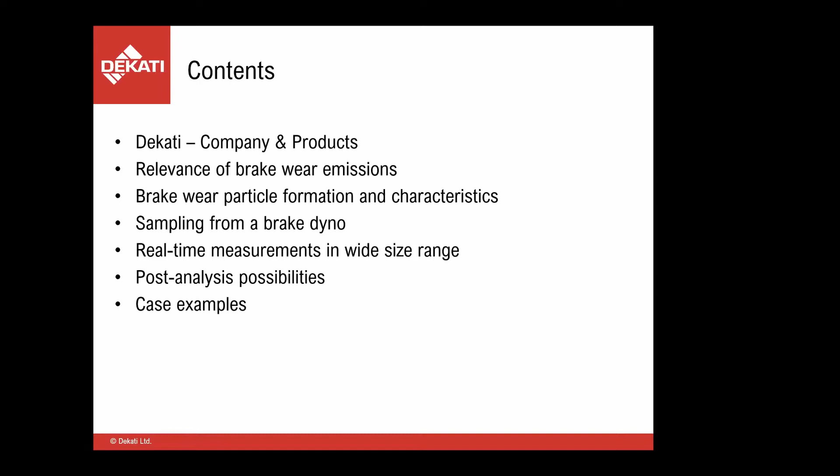A couple of words about Dekati. Dekati has been around for over 25 years now, and we sell, manufacture, and develop new fine particle measurement solutions. The core competencies are in real-time measurement instruments for wide size range, and also sample conditioning for all kinds of atmospheres and all kinds of measurement applications. Dekati is a privately owned company, originally spun off from Tampere University of Technology Aerosol Physics Lab, and we're located in Kangasala, Finland. Most of our sales go to export, and we have a wide distributor network. We have over 20 high know-how employees in the company, and very recently we got the ISO accreditation also.

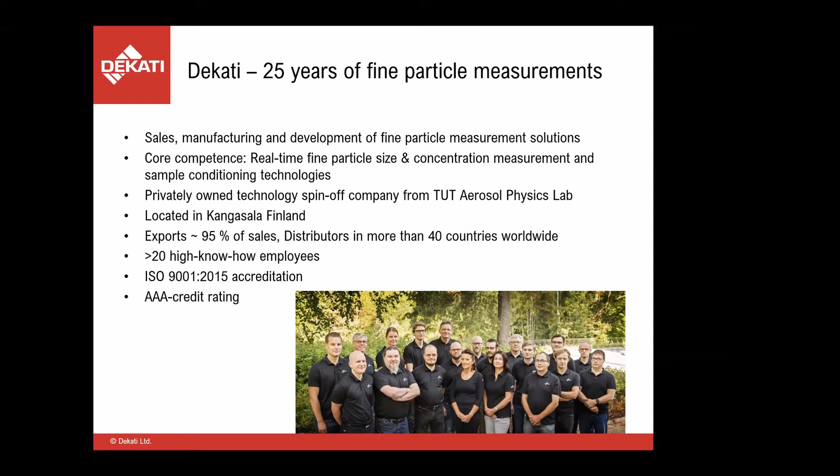We'll not go through this in detail, but we have several real-time instruments. Then we have impactors for gravimetric measurements, like offline methods. And then we have a variety of sample conditioning devices to also get the sample from high temperature and high concentrations.

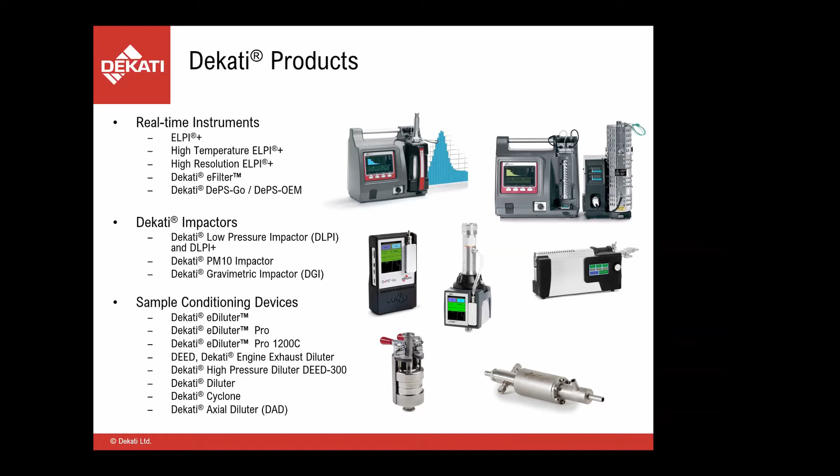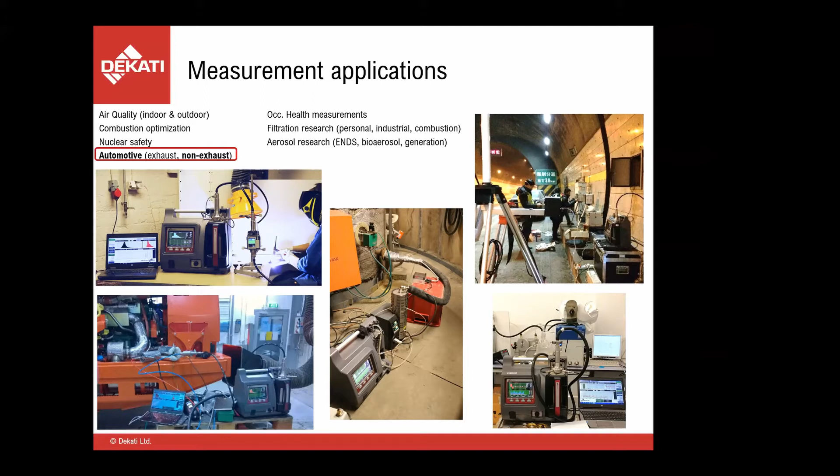Our instruments are being used in a variety of different applications. Today we will focus on the automotive application, and to be more precise, on the non-exhaust applications. But Dekati instruments are widely used in, for example, air quality, combustion studies, nuclear safety, and also filtration research, which was the topic of the previous Dekati webinar, which you can find on our YouTube channel if you want to have a look at that as well.

Okay, let's hop into brake wear emissions then. So when we look at traffic and road transport, there's a way to categorize the particle emissions coming from traffic into non-exhaust and exhaust emissions. And actually, according to the studies, their contribution to total ambient PM10 emissions are roughly equal nowadays. The exhaust emissions are obviously related to the combustion in gasoline or diesel engines most often, and most of these exhaust emissions then come out of the tailpipe of the vehicles. But then if we look at the non-exhaust particle emissions, their most significant sources are brake wear, tire wear, and road abrasion.

According to the studies, brake wear contributes to about 16 to 55% of non-exhaust emission PM. And the largest fraction is seen in urban areas because of the braking frequency being higher, and obviously also a lot of vehicles there and a lot of stops.

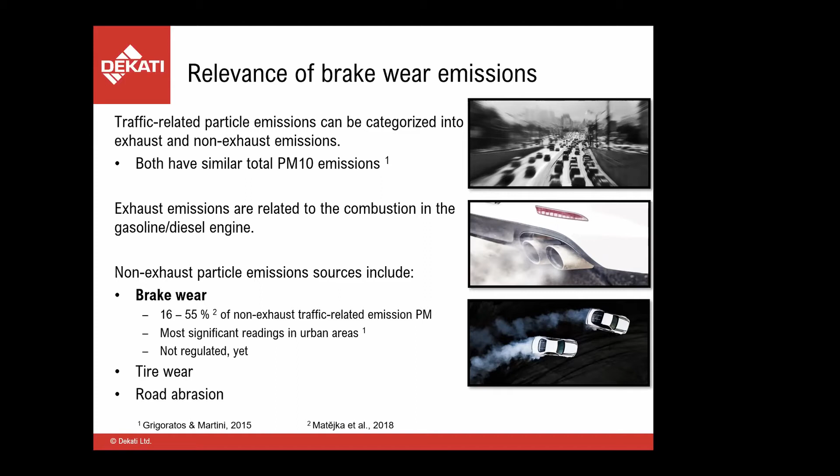Brake wear emissions aren't yet regulated. There is work being done towards legislation to work on recommendations for that, but that is still yet to come and under processing. Today we will focus on brake wear, although tire wear, for example, is also being studied and researched more and more nowadays.

If we look at the development of the situation with these non-exhaust emissions, this is from UK Department for Transport. Looking at their graph, we can see that the decline in this century in exhaust emissions for PM2.5, particulate matter under 2.5 microns, has been very fast. So we are already in a situation where the non-exhaust PM2.5 exceeds the exhaust PM2.5 because of the more efficient cleaning and filtration and the engine technologies and the after treatment.

And this is mostly for diesel and DPF filters, for example. But if we look at what they forecast to be the situation, for example, in 2030, the non-exhaust PM2.5 will already be about 10 times the amount that the particle emissions PM2.5 come from the tailpipe.

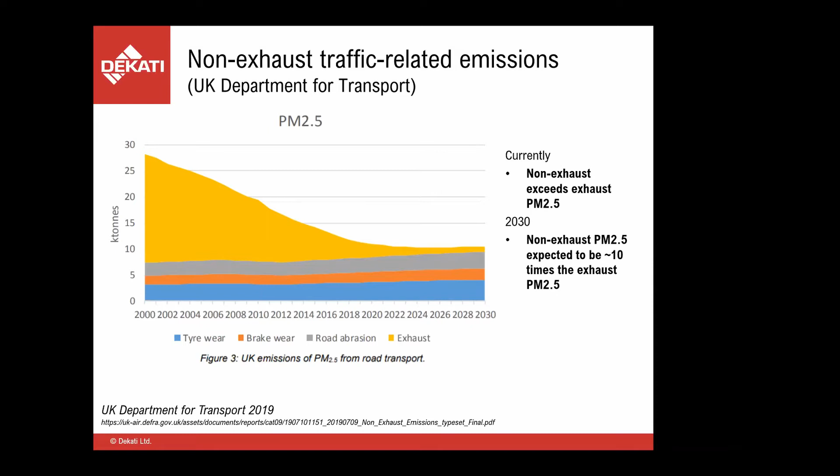Here is another graph from the same document, and this shows the PM2.5 and PM10 emission inventories submitted by Germany as an example. So again, the exhaust has gone down quite a bit, but the tire and brake wear emissions and road abrasion has gone up, in fact.

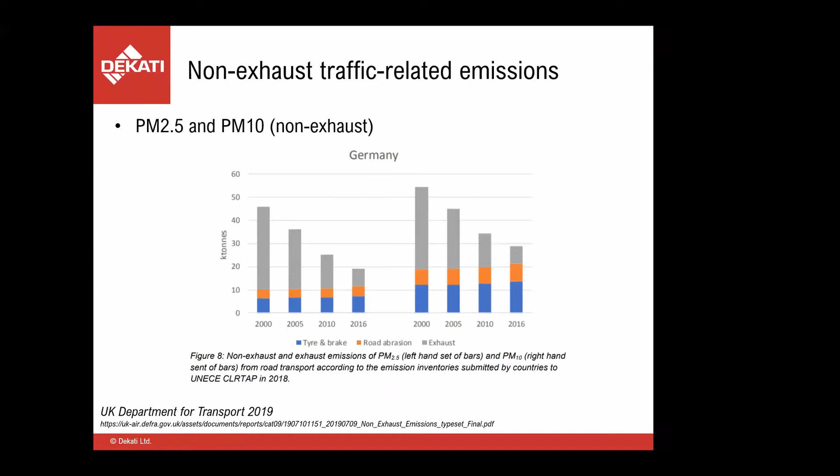So then we will have a brief look at how these brake wear particles actually form, where do they come from exactly? Here we show probably the most usual suspect in brake wear particle formation, the disc brake system.

There's the brake pad and the brake disc, and when the brake pad is being pressed against the brake disc that is on the brake caliper, that causes the friction that then decelerates and eventually stops the vehicle. This physical contact causes friction, and this friction causes mechanical wear to these parts when they are pressed together, and the disc is in fast motion.

So this is causing larger particles, and the coarse mode is caused by the friction. On the other hand, the brake disc and the pad get into quite elevated temperatures because of this friction. And when they are hot enough, there happens some volatilization. So some of the material evaporates, and that then causes the nucleation and accumulation modes, so the much smaller particles down to nanoparticle sizes. So all in all, the brake wear particle emissions come in a wide size range.

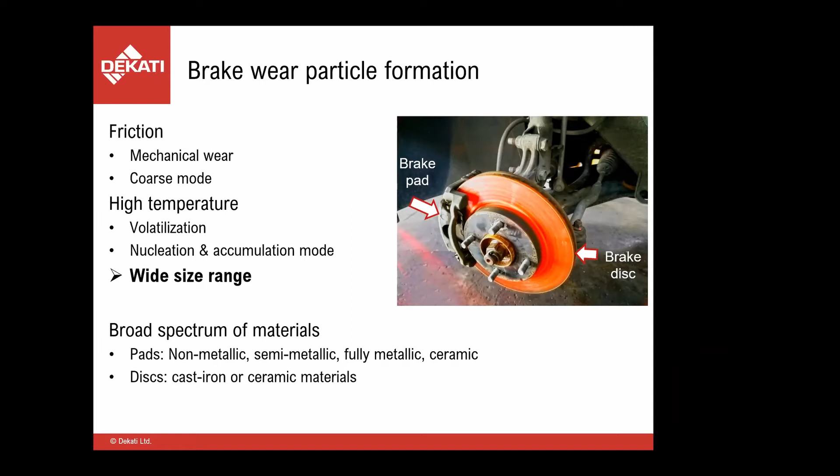Here we can see an example of just the different modes of particle emissions, or particles in general. There's the nucleation mode, around 10 nanometers, for example, and these primary particles, when they coagulate and agglomerate, they cause also the accumulation mode, and also condensation plays a role in this size of particles. Then the mechanical processes in this case usually cause the coarse mode, which is then around several microns in size range and can be also over 10 microns.

So in brake wear particles, we see all of these three modes, obviously depending on the type of braking and also the materials and the speed and the temperature. But in general, the size range is wide.

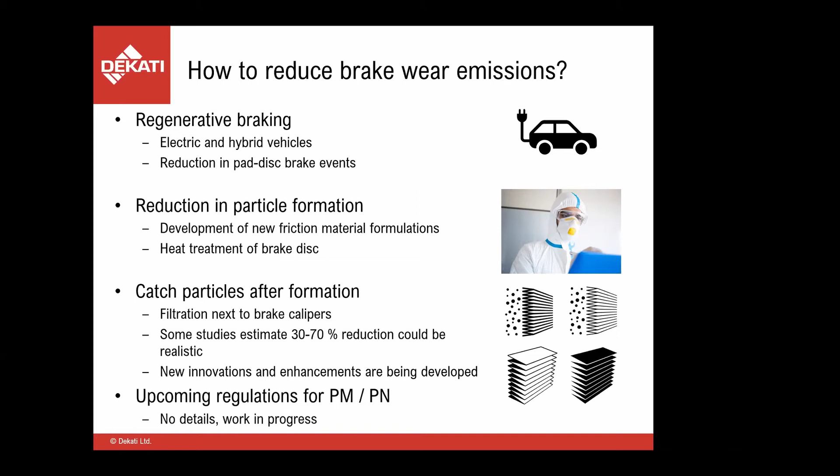Do you think the accumulation mode particles are only caused by coagulation of nucleation mode particles? In our measurements, we see particles of the same size already when the brake is still cold, and thus without nucleation generated particles. Good question, thank you for that. Actually, I agree that the accumulation mode does not come purely from coagulation. I agree, also in the results I have seen and in the measurements I have been involved in, that the accumulation mode does not only come via these small primary particles. There are also particles emitted straight from the process itself. So thank you, I agree on that, and probably it was something I did not cover clearly when talking about this particle formation. Thank you.

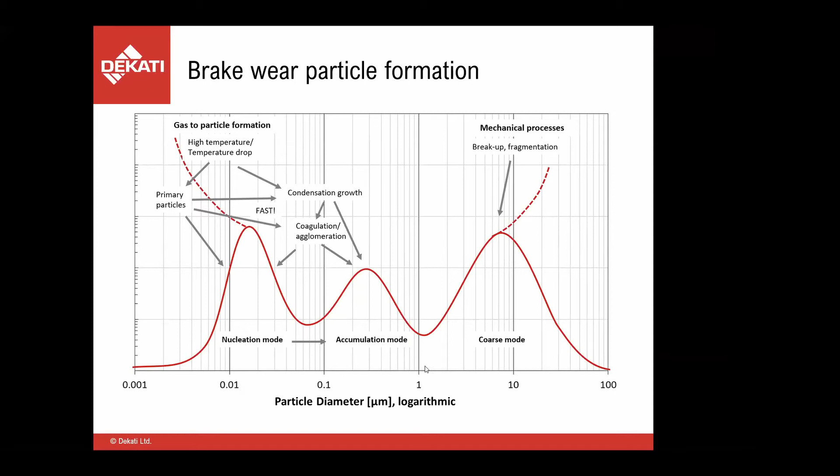The basic idea usually is that we need to have a controlled amount of air flowing into this enclosure, and then we have to make sure that there are no particles in the air before the brake event happens. So we feed air, and the air is being cleaned in the HEPA filter. Then particle-free air enters this brake chamber, and the brake itself is usually operated according to some defined drive cycle, for example WLTP.

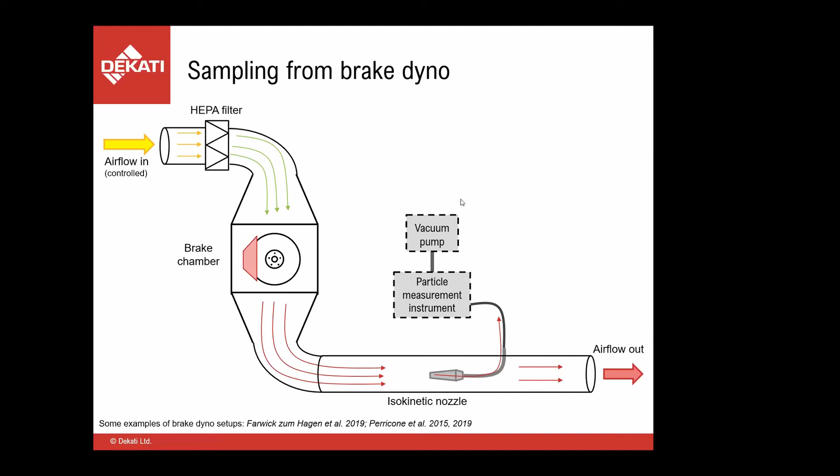So now we will have a look at the measurement solutions, or some of the measurement solutions we have provided for this application.

So let's have a look at the Dekati ELPI Plus, the electrical low pressure impactor. The features of this instrument are that with it you can get a real-time particle size distribution and concentration, and it gives the results at 1 Hertz or up to 10 Hertz. So it can cope with transient drive cycles, for example, and keep up with the pace, showing also the quick changes in the size distribution or concentration readings.

From the instrument response, the number, mass, volume, surface area, or LDSA can be calculated. I will show the operating principle in the next couple of slides after this.

Also, it enables measuring the particle charge, net charge size distribution, so you can also measure the natural charge carried by different size particles. Their net charge and size range is wide, going down to nano sizes of 6 nanometers and up to 10 microns in size.

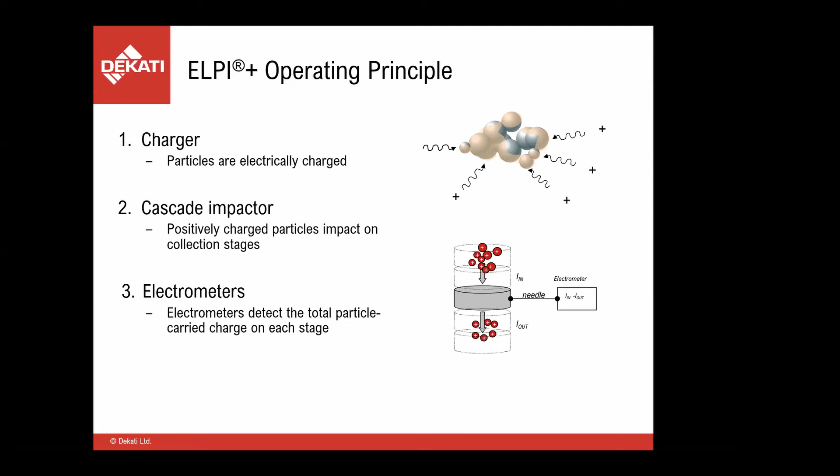So here's an image just showing all other things connected into this basic idea. So we have the charger and pre-separator that separates the over 10 micron particles in the beginning, and there's a tungsten needle and a high voltage source to cause a flux of positive ions to charge all the particles, and then they enter the impactor. And there are electrometer needles connected to each stage of the impactor.

And the last stage is a filter stage which collects all the particles smaller than approximately 15 nanometers, and then gives also the electrical reading and the real-time reading from that. But for all the other sizes, you also get the particle collection.

And flow control is easy because the smallest holes in the stages at the lowest stages act as a critical orifice. So when the low pressure is set to 40 millibars, the flow is always approximately 10 liters per minute. The precise value is in the calibration sheet of each instrument, but it doesn't need any flow controller. That should be calibrated from time to time, for example.

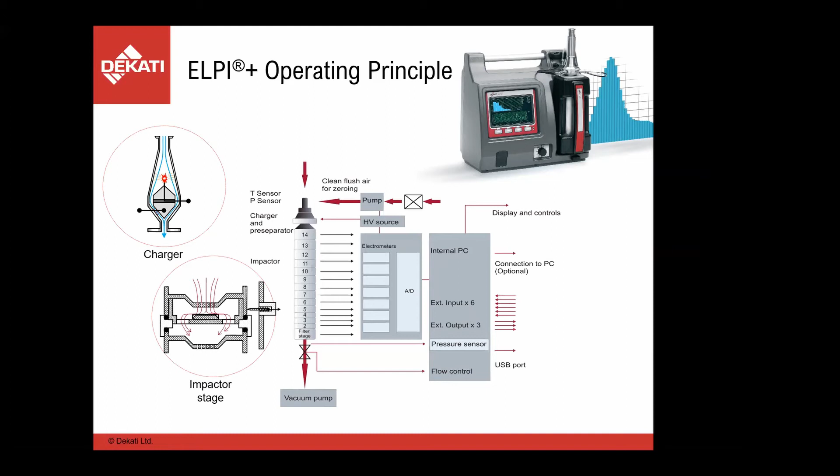And one important aspect in many brake wear emission research cases is the possibility to do post-analysis. One of the reasons behind this is, again, the very complex nature of the materials and mixtures in the brake pads, for example. So the ELPI+ collects the size classified particles on 14 different collection plates. Usually aluminum or polycarbonate collection substrates are used, but other thin materials can be used too if necessary.

And when the sample is collected onto these collection substrates, it enables various kinds of post-analysis methods. For example, basic weighing to get the actual gravimetric mass, or microscopy images, elemental analysis, and all kinds of chemical analysis, depending on the objectives of the research.

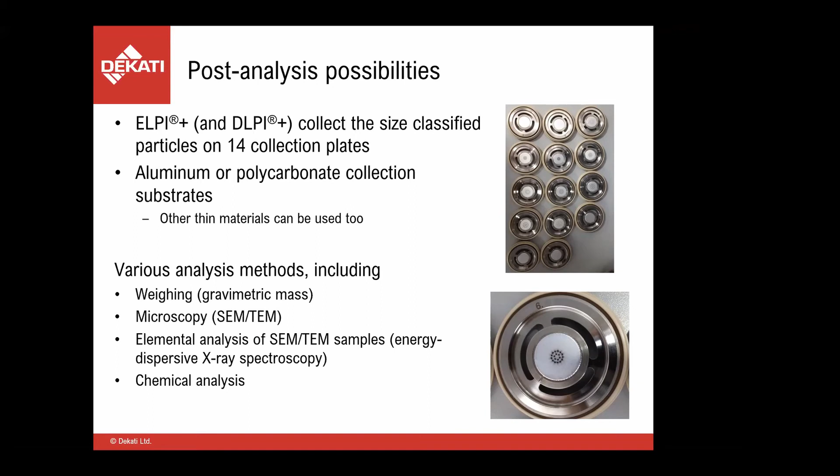And I mentioned here also the DLPI, which is the Dekati low pressure impactor. So we also have in our product line impactors that don't give out any real-time data. So there's no charger or electrometers connected, just the impactor itself. So with those, you can get the gravimetric mass and all the other post-analysis possibilities too, if the objective is only to look at the post-analysis of the size classified samples.

Then another instrument I will show you briefly of our product line is the Dekati E-filter. So the E-filter is a traditional standardized gravimetric PM filter holder combined with a real-time detection module. So this enables studying the mass of the sample. You can look at the total mass emitted, or if you have a pre-cut, for example, a cyclone in front of it, PM2.5 is also possible.

But if you only have a gravimetric filter holder, you don't get any real-time data. Obviously, you only get the one reading of PM once you've done the whole process of conditioning and weighing the filter, and so on. So with this instrument, you also get the real-time signal that gives insight on when most of the sample was collected, and you can then compare different measurements with one another and do kind of quality control as well.

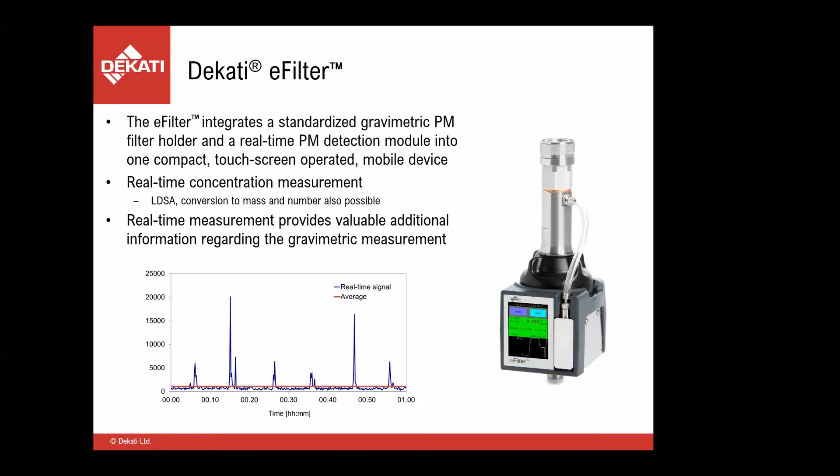Real-time measurement then provides obviously some extra information that wouldn't be possible with only the filter holder. And the basic idea is that there is the PM filter holder designed according to standards, but there's a small side flow of 0.5 liters per minute pulled with an internal pump into this detector block. And the detector block has a charger and a single electrometer connected to a Faraday cup filter inside it that gives the reading.

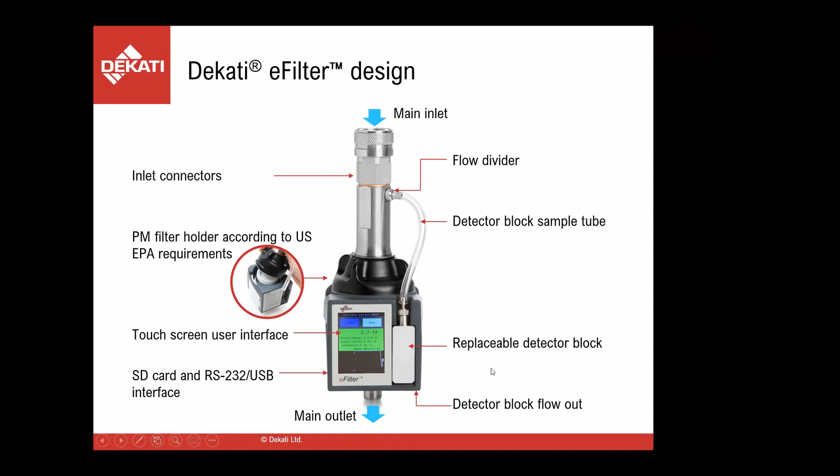And it can be used battery powered, or the power cord can be also connected all the time. And here is the operating principle image. So some similarities to ELPI+. Again, there's the corona discharge. The charger charges the particles.

Ion trap to remove the excess ions, which is also there in the ELPI+, which was not mentioned, but then the Faraday cup filter then is there to collect the particles, and the electrometer is connected to this filter to measure the current carried by the particles. And a small pump to pull this ½ liter per minute flow is inside the unit, but then for the actual gravimetric filter collection, a separate pump with flow controller is needed.

I see there are a couple of questions. I could have a look at this point. One question is, which substrate do you recommend for SEM examinations? Well, this is a good question. I personally don't have experience on doing the electron microscopy, but I would personally look into some previous research and have a look at that.

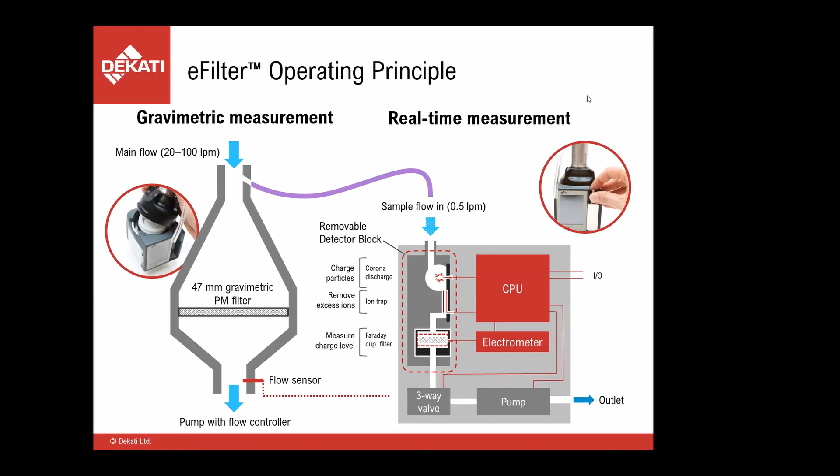All right, thanks. Well, we covered the questions now. For now, let's go into the few case examples. I chose these examples to demonstrate the different possibilities to do with the ELPI+ and brake wear particles. So here's a couple of images from a presentation shown in a conference, the SAE Brake Colloquium, by Alemani and others. So this was a pin on disk study.

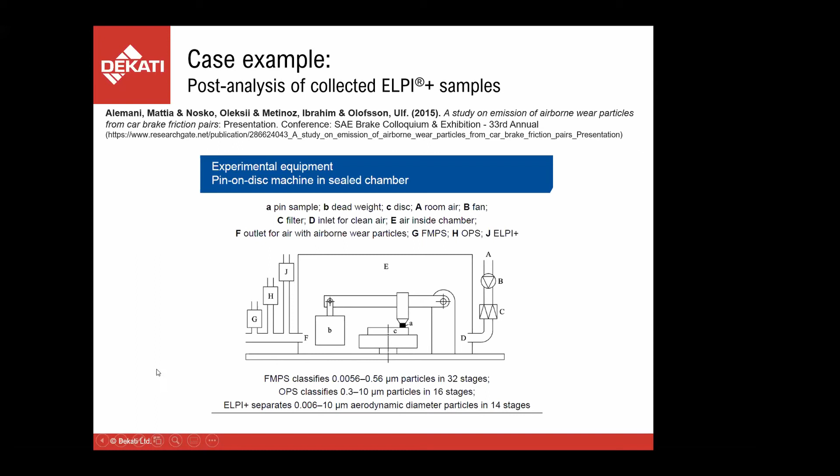So here was ELPI+ sampling and also FMPS and OPS. And what they were able to do with the ELPI+ is to collect the samples also for post-analysis. And here are some electron microscopy images taken from different size ranges from the collection substrates of the ELPI+, just as an example of this post-analysis.

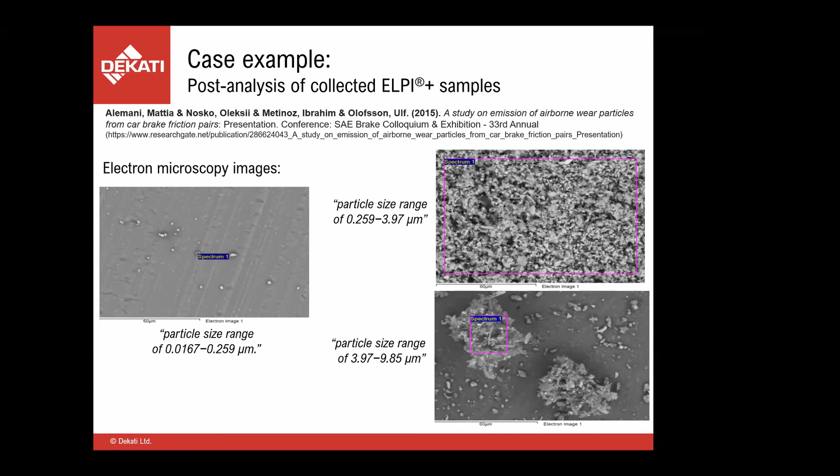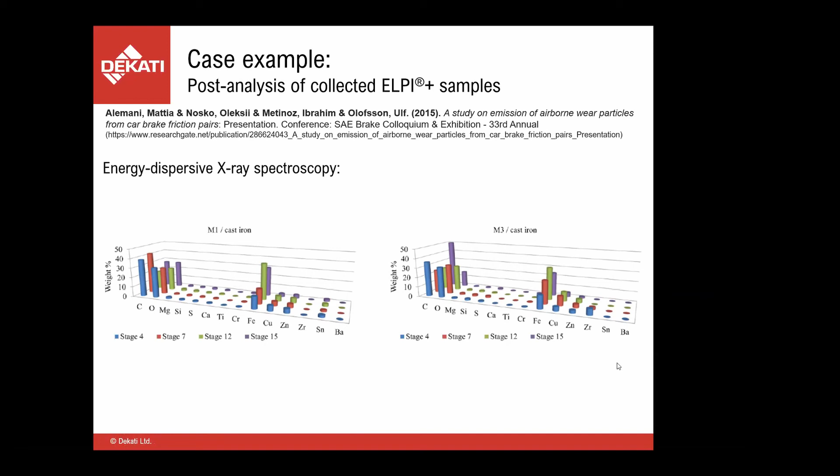Moving on, so we will make it through the presentation. A couple of images from the same presentation. So they were also able to do energy dispersive X-ray spectroscopy to look at the different materials found in the different brakes that were studied in the test, using the sample collected on the ELPI+ collection substrates.

And in these measurements, we had ELPI+, then we had the E-filter and Airmodus CPC, and we also had a PM10 pre-cut cyclone, which are also available from Dekati. In this case, ELPI+ has a pre-cut inside it, but this was mostly here to protect the CPC from malfunctioning from the larger particles. But also, the cyclone collects all the over 10 micron particles into the cup, so it also enables post-analysis of those.

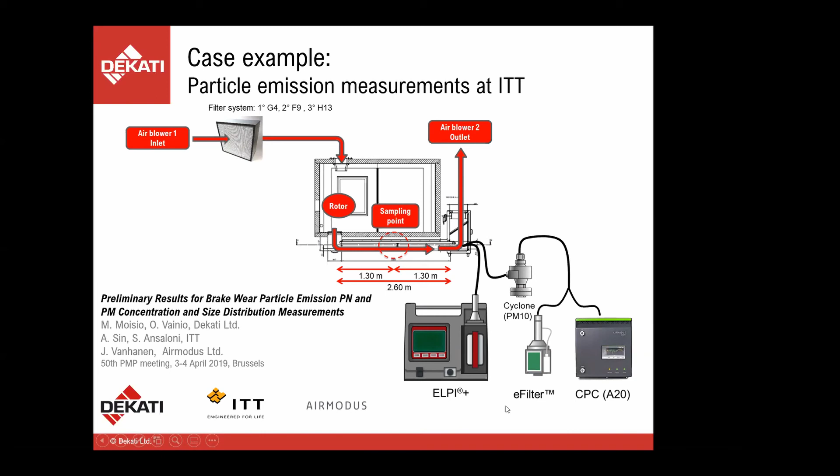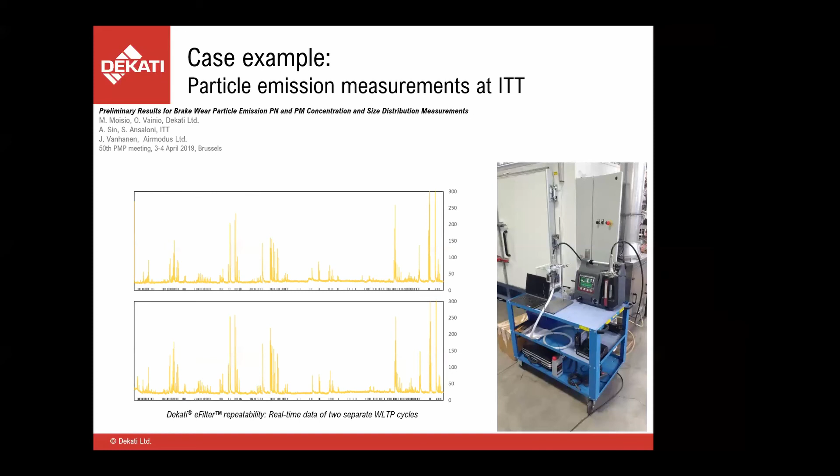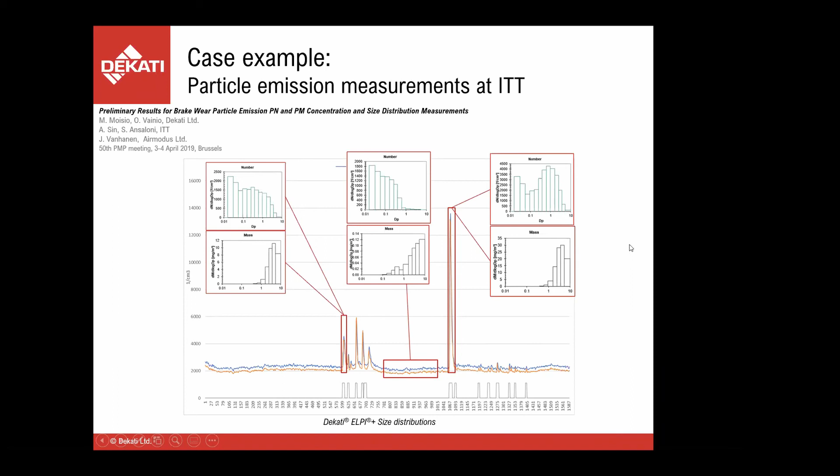And again, showing that the size distribution in this kind of peak can definitely have very high concentrations, looking at number size distribution, also in some of the higher sizes, not only the nanoparticles.

And this example is then a bit different type of study done by Perricone and others. It was concerning the volatility of brake wear emissions. It was done by Brembo, Technical University of Ostrava, and KTH from Sweden.

The idea is that the volatility of emissions is often important because, for example, in urban background, only about 1/3 of the PM2.5 can be attributed to primary aerosols. So a very large part of the actual PM2.5 concentration in the air that we breathe can originate from secondary aerosols that are formed, and they wanted to study this effect or phenomenon in brake wear emissions.

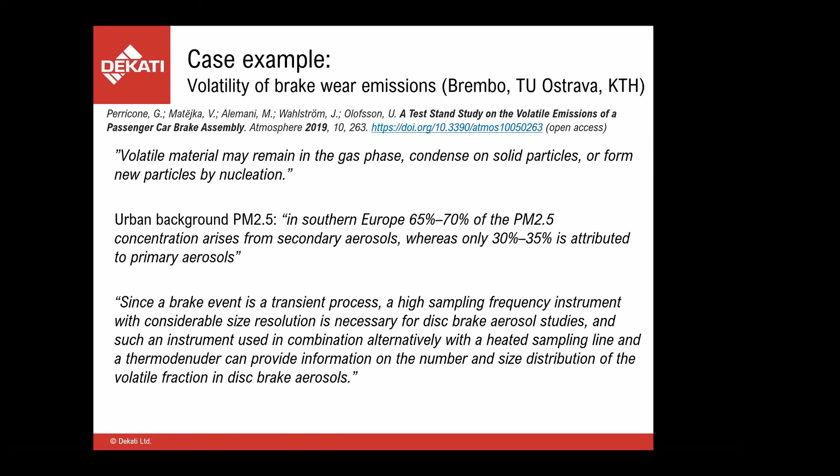They pointed out that brake events are transient, and a high sampling frequency instrument with high size resolution is necessary for these kinds of studies. The opportunity to use a heated sample in combination with different sampling and sample conditioning solutions was vital.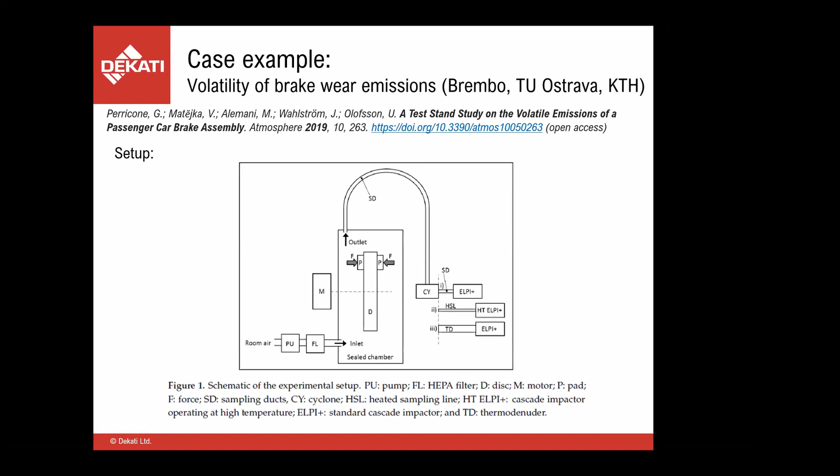So in their setup, after the brake chamber, they sampled with the ELPI+ in three different settings: one ELPI+ with just a standard sampling line, then a high temperature ELPI+ version with a heated sampling line—where also the impactor part is heated, up to 180 degrees Celsius, so you can measure a hot sample without the need to dilute it—and the third setup was a thermodenuder with ELPI+.

They then compared the results with the different setups.

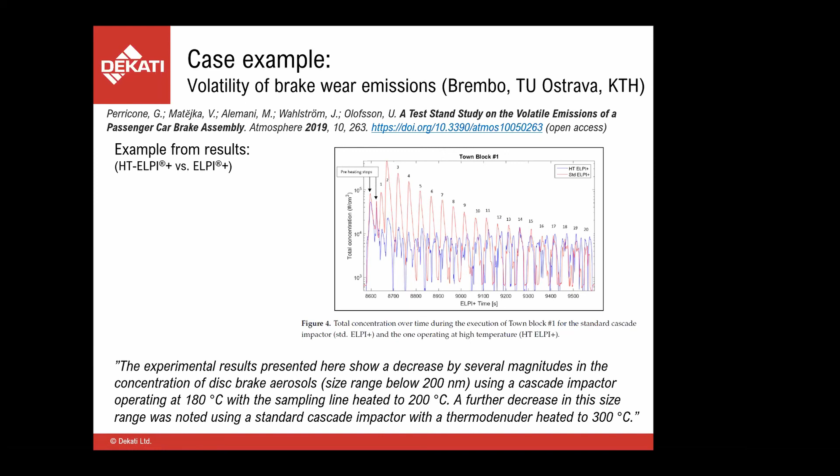It's an open access study, so we unfortunately don't have time to look at it in detail, but just as an example, here is one graph that shows that the high temperature ELPI+, for example in the beginning half of this drive cycle, showed much lower readings than the standard, because there were volatile species also involved in the particle matter that was emitted. So they found considerable differences depending on whether they eliminated the volatile species or not.

To conclude, I will have a look at the last questions after this.

So the particle size range is wide, and there's definitely a broad mixture of components and materials. Usually the measurements are done over a transient drive cycle that is already predefined.

For these studies and research purposes, the ELPI+, and moreover the high resolution ELPI+ if more channels are needed—for example to look at the number size distribution—is definitely a useful research instrument for this application, because with a single instrument you can cover the whole size range. You don't have to have several different instruments with different working principles, and you also get the size distribution second by second. You don't need to wait for it to scan to get the size distribution over this range, which is vital in transient conditions.

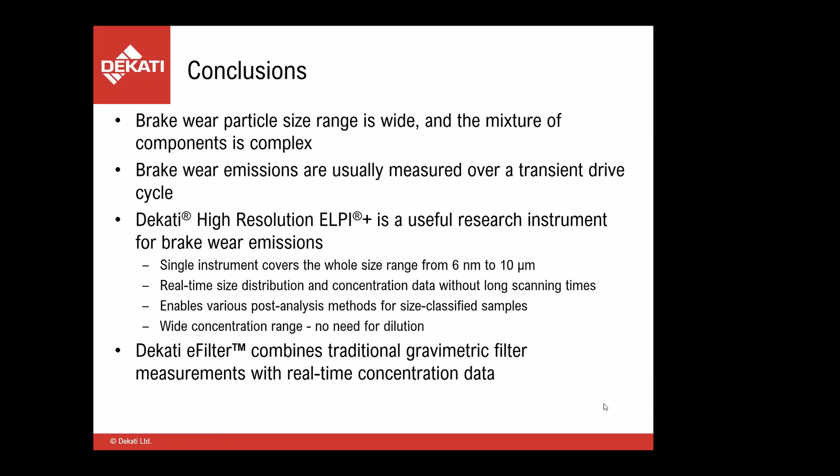Okay, thank you, and I will have a look at the questions now to wrap it up.

One question is: how frequently do you need to clean and maintain the ELPI+, and how can counting efficiency change over time?

In general, this depends a lot on the concentrations, but now as we are focusing on brake wear emissions, according to my experience, it is possible, even with the analysis plates where you have smooth collection substrates, to have it running a day or two with drive cycles going on and not needing to do any maintenance in between. It depends on how rough the cycles are, obviously, and how much particle matter is emitted, but it doesn't need to be cleaned and maintained all the time.

It is actually quite long—5 to 10 times longer if you use the sintered collection plates, roughly. So it's not easy to put a certain number on it, but the loading in the brake wear application usually doesn't appear too quickly, so that it would be a pain to keep cleaning it all the time. So it's not usually an issue in this application.